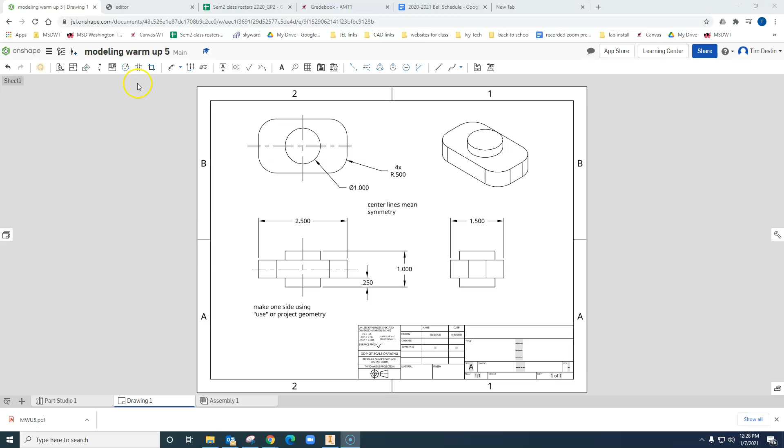There's a lot of different ways to make this shape, but we're going to use it to learn the project geometry tool. So I'm going to go ahead and start a new document. Actually, I'm going to erase this one.

And I'm going to start a sketch. I'm going to start in the bottom view because that's the way it's oriented in the drawing. I'm just going to make a rectangle. And oops, it got off there. So what I'm going to do is use my coincident constraint, and I click those 2 points and it'll line it up so then they're on that.

So let's go back, I already forgot. So our overall width is 2.5 and our depth is 1.5. So I'm going to go ahead and add those. So it's 1.5 this way and 2.5.

Alright, so I'll go ahead and extrude this. Again, when we look at this, because it's symmetrical, we know that this has to be half from the center line. So those two sides are equal, and these two are equal. So that means it splits it up into quarters, essentially.

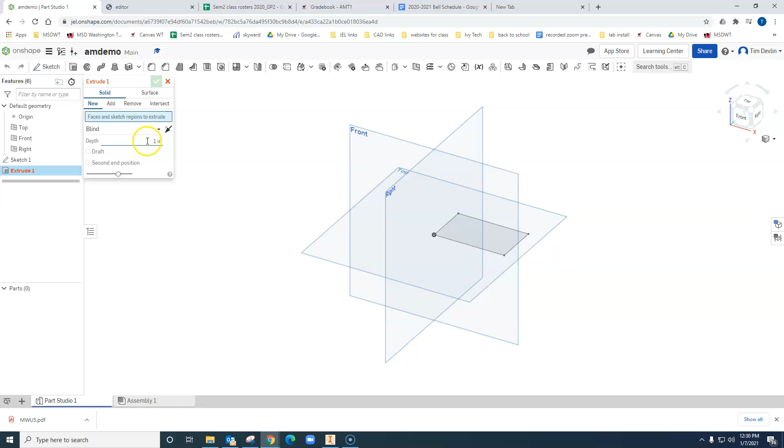So there's 2 of the quarters in the middle and 1 on the top. There's 0.25. There's 0.25 up here. That means there's 0.5 left. So that's what's left in there. So we'll extrude that, we'll say 0.5, and we'll click inside of our shape like that.

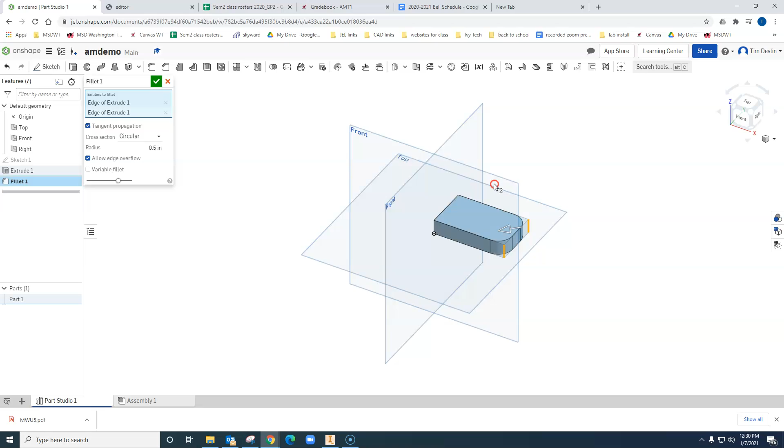Alright, now we're going to go back to our drawing, and the radius of all 4 sides are 0.5. So I'm going to do fillet, and I'm going to put 0.5 in, and I'm going to click there, there, there, and there. So now I have 4 fillet sides made.

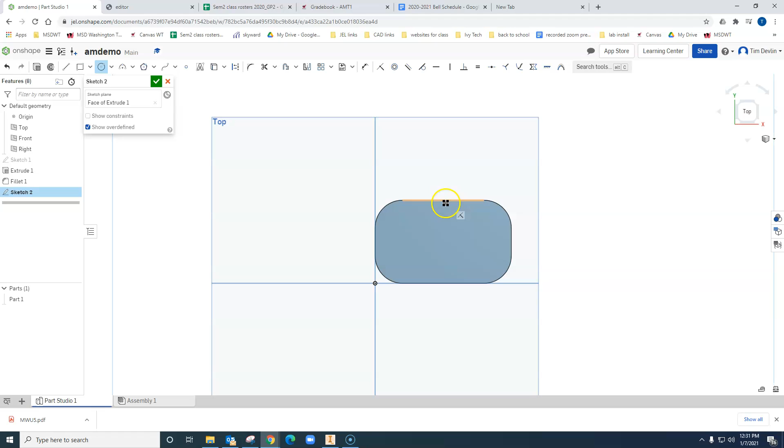So it's all rounded. Now we're going to make our first circle. So I'm going to sketch on the top. You can right click, view normal sketch plane, so it goes down. We're going to use our midpoint constraint here because it's in the center. So I'm going to find the midpoint there, the midpoint here. I'm going to go to the middle and boom, it locks in.

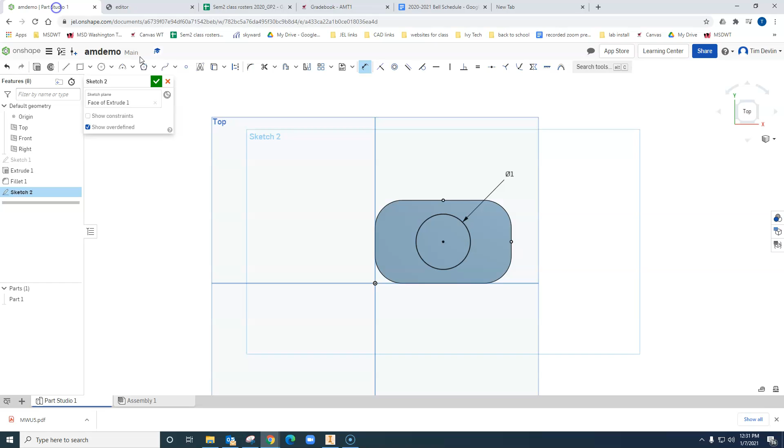Make my circle, dimension. This will be 1 inch, I believe. Yes, diameter is 1, and it's in the center because we have these lines that show that it's in the center. So I'm going to extrude this. I actually do remember this, it's 0.25. So I'll put 0.25 in.

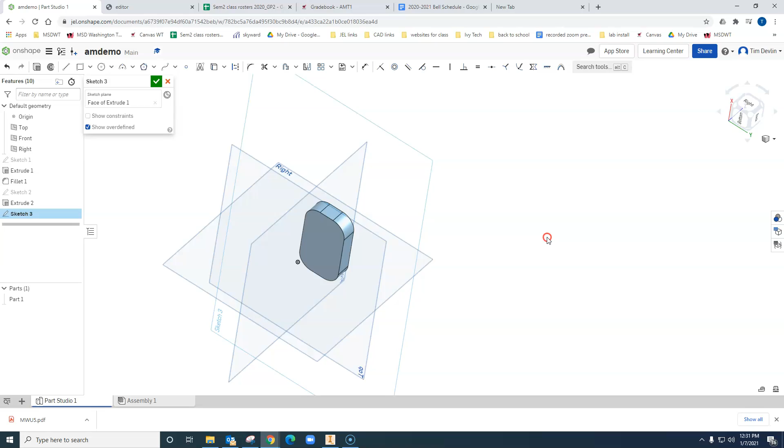Now we got to do the one on the bottom. And I could just go draw it and center it and everything else, but I'm lazy, so instead I'm going to do this. I'm going to start a sketch, click on the bottom, and I'm going to flip it over so I can see the other circle. I'm going to click Use, Project. We call it Project Geometry, but it's called Use in here. Select that circle, and when I click on it, it draws it on the other side.

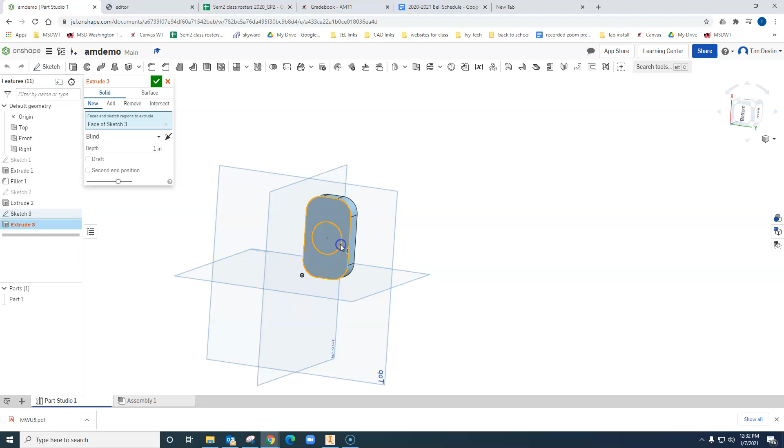So then I'm free to just extrude. Oh, not that, I want just the circle. And I do 0.25. Click the check, and there's my finished part. So I pull the properties, put it in there, and answer the rest of the questions about the shape.